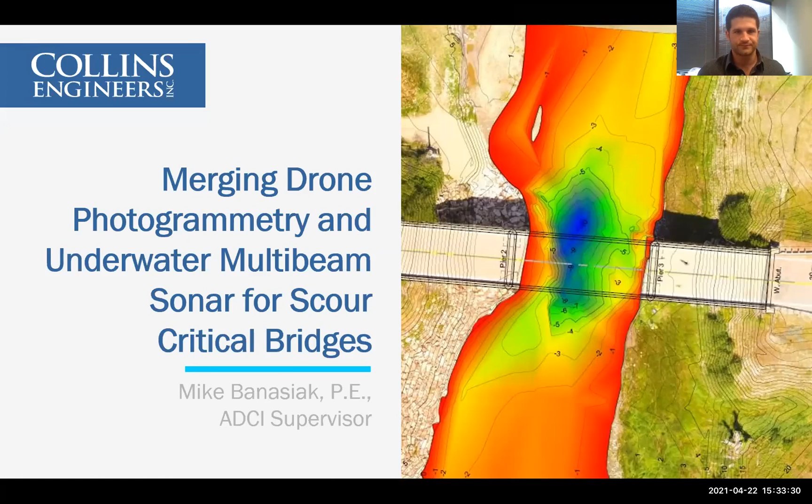That's where this project comes in. Today I'll be sharing results of an idea and project where we combined a few emerging technologies, notably drone photogrammetry, imaging, and surveying, and underwater multi-beam sonar, to produce final products that are easy to understand, quantify, and interpret.

We'll go through a case study of underwater bridge inspections we performed for Montana Department of Transportation in 2019. They came to us with a handful of their higher priority scour critical bridges. For those not familiar with the term, a bridge is defined as scour critical if the foundation of one of the substructure units, an abutment or a pier, is rated as unstable due to observed or evaluated scour—essentially the removal of channel bottom material like sand, gravel, or rocks due to swift moving current, or the effects of erosion around substructure units.

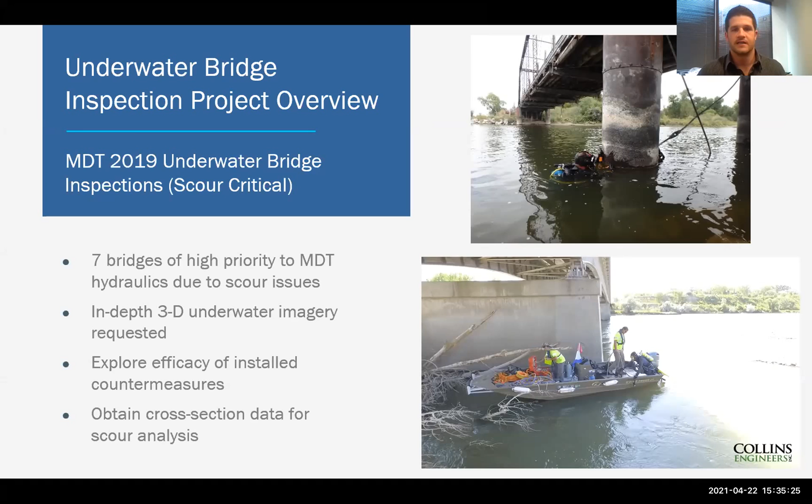The intention of this project was to perform in-depth underwater inspections, including multi-beam imaging, to assess the efficacy of scour repairs such as riprap and articulated concrete blocks, items placed around a pier to mitigate the erosive effects of high flow. We would also use multi-beam underwater imaging to establish a more detailed baseline for future inspections. These underwater inspections are our company's bread and butter—I'm a diver myself, and we use these tools to supplement our actual diving inspections.

A little bit about multi-beam sonar: underwater bridge inspections can be complicated due to factors like high flow and zero visibility, as shown in the photo of the Yellowstone River. One tool we use to illuminate details of submerged structures and adjacent channel bottoms is underwater acoustic imaging. At its most basic, a transducer mounted to a boat or tripod in the water shoots sound waves out in all directions, reflecting off surfaces—be it a pier wall, rocks, or timber on the channel bottom—resulting in point cloud data, essentially underwater 3D images.

This information can be incredibly useful—not only can it prime the engineer diver with an idea of what to expect and explore underwater, but it also results in hard data that can be replicated in future inspections, comparing changing conditions in a more quantitative manner than the subjective perspective of just one diver.

This is where UAVs and drones came into play. Underwater bridge inspections aren't simply confined to the waterline and below. There's a lot of valuable information gleaned from embankments, floodplains, and the behavior of surrounding terrain that influence the water's effect on substructure units of the bridge, especially in Montana, where water levels of some of these large bridges are highly variable.

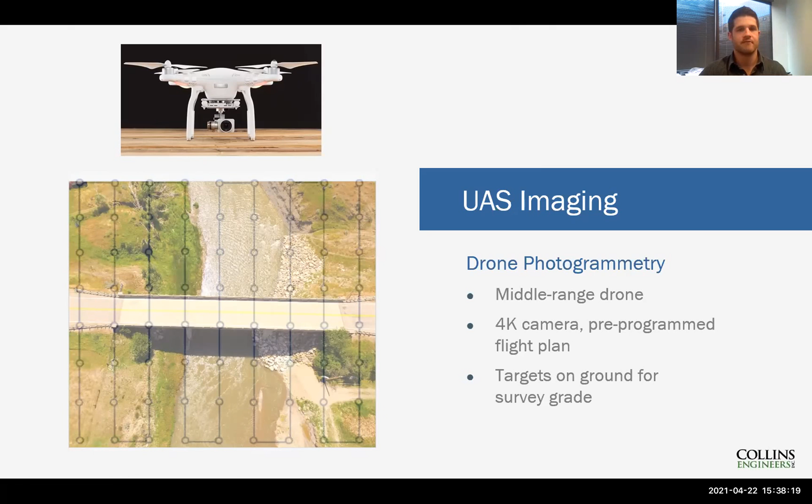So again, we're pressed for time, so I'm going to dive into some examples. What you will see is basically a 3D navigable image created by merging data from our drone photogrammetry with our underwater multi-beam sonar. Right now you see a photo from our drone superimposed on our image.

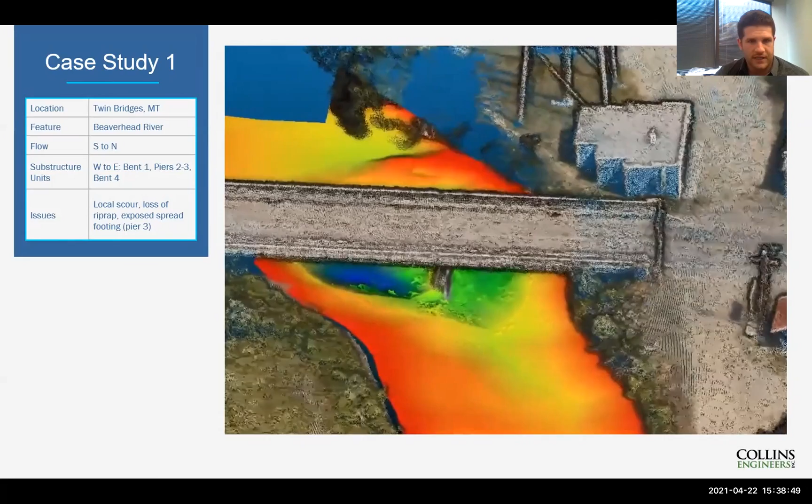I'm going to fly through and we're going to talk a little bit about the scour's effect at the bridge. For this bridge, we are looking upstream, so the water's flowing from south to north, from the bottom of the screen to the top. You'll notice from our underwater imagery, we capture a little bit of this exposed footing at the upstream nose.

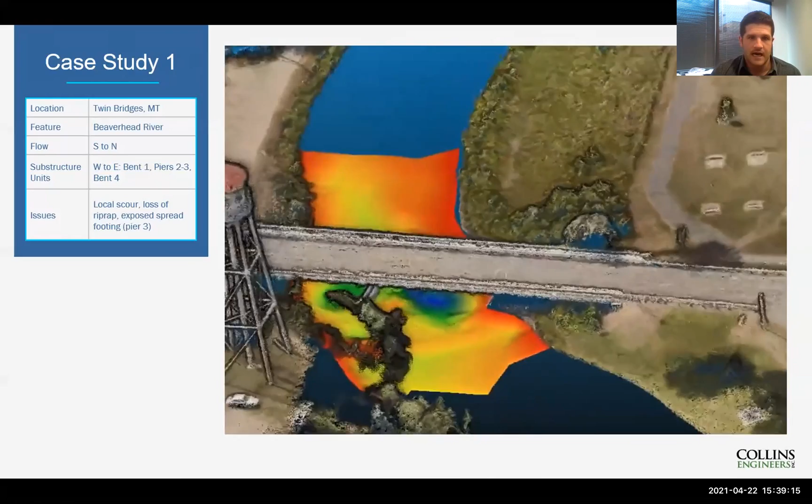As we zoom out, we notice that the channel is on a bit of a curvature, resulting in a slightly oblique angle of attack at that upstream nose. A little bit about the model: the colored area denotes the waterway. Red is shallow, blues and purples are deeper.

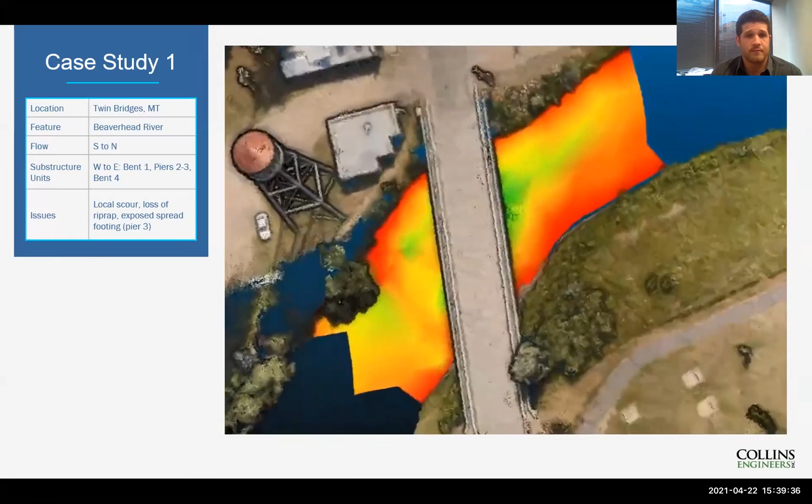So we notice this little area of local scour in this west span. Potential concerns at this bridge could be migration of the scour to the east, where it might threaten the exposed footing of the pier.

The advantage of this is, normally we conduct in-water surveying, single beam or multi-beam, acoustic imagery and sonar essentially in the water, so we just typically have a contour map confined to the water.

Adding the information from the drone surveying, we now have a contour map extending into the floodplains outside of the waterway, which can be useful, particularly for doing scour calculations, calculating cross sections, and planning for higher flow events.

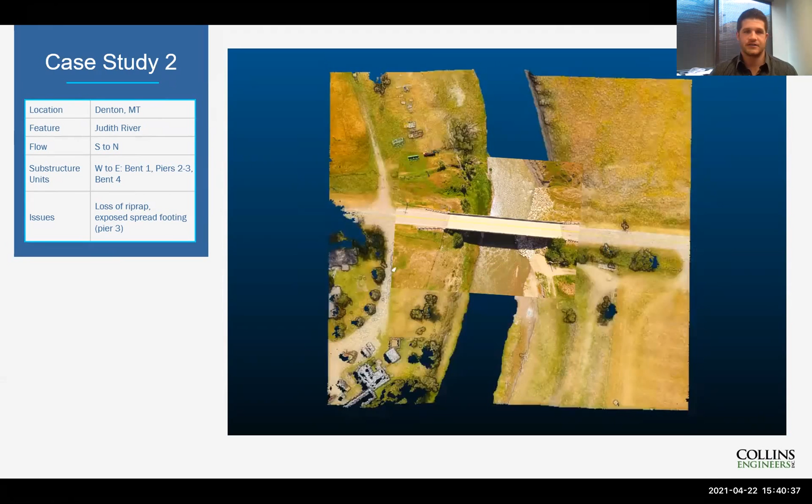Again, I'm speeding through this, but I've got some cool examples I'd like to show you. So this is another similar case where you're looking at the drone photo superimposed on our model, and I'll click and we'll zoom through.

With this example, the river's flowing from the bottom of the screen to the top. You'll notice basically we have two piers that are just barely in the water. I want you to pay attention to the riprap along this west embankment.

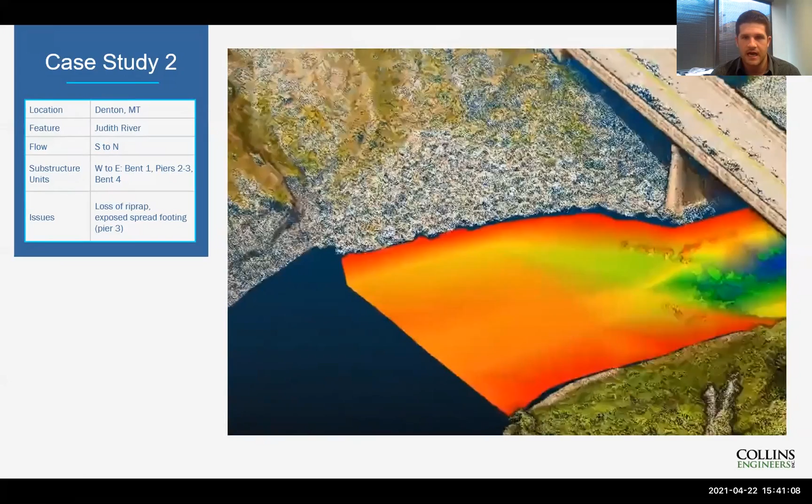So notice, we've had some riprap, or scour mitigation countermeasures, placed along this embankment, basically to encapsulate some of the footing of this pier. Some riprap was placed along this pier, but it looks like it's largely washed away.

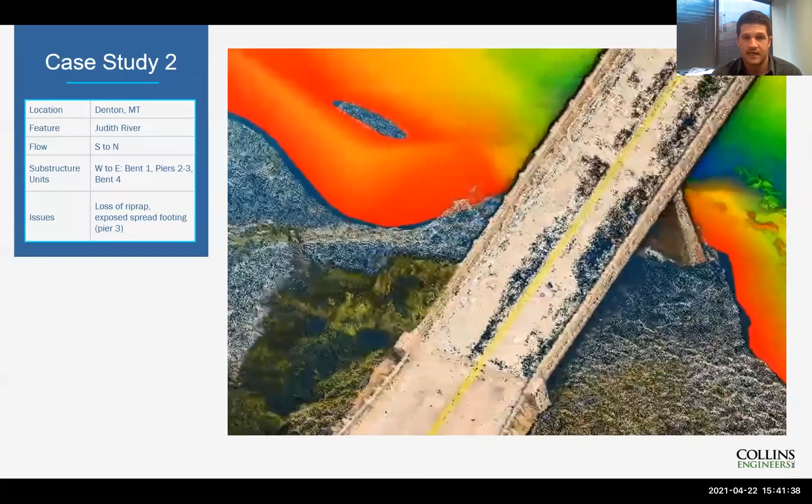From our underwater imaging, we're capturing the side of this exposed spread footing with maybe about a half foot remaining embedment. You'll notice that the underwater imagery captures some of the jagged edges of the riprap, and as we zoom out, you can confirm and see the interface where we capture the riprap via photogrammetry.

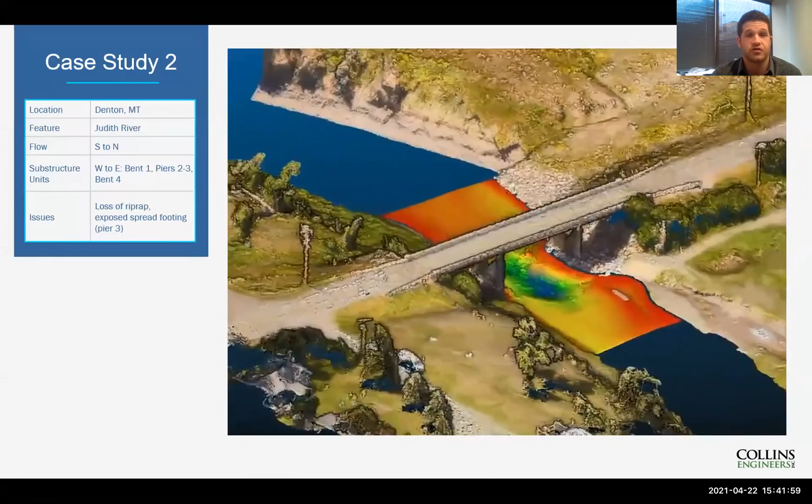As we zoom out, you'll understand the obvious reason for some of this local scour: basically our channel contracts right at the bridge. We have maybe about a 20% contraction of the channel, forcing equivalent flow into a smaller area, resulting in much more turbulence and local scour at the bridge. So I said, pay attention to the riprap.

You'll notice right here this riprap that's been placed is starting to undercut. We've got a big steep cut bank on the upstream edge, and we're starting to cut into that riprap, captured on our photogrammetry. A normal inspection would note it, but an advantage of this model is that it can be easily replicated, and we can calculate quantities and rates at which this riprap might be undercut or washed away. This model could also calculate quantities of missing riprap for maintenance items, giving prime contractors more accurate bids.

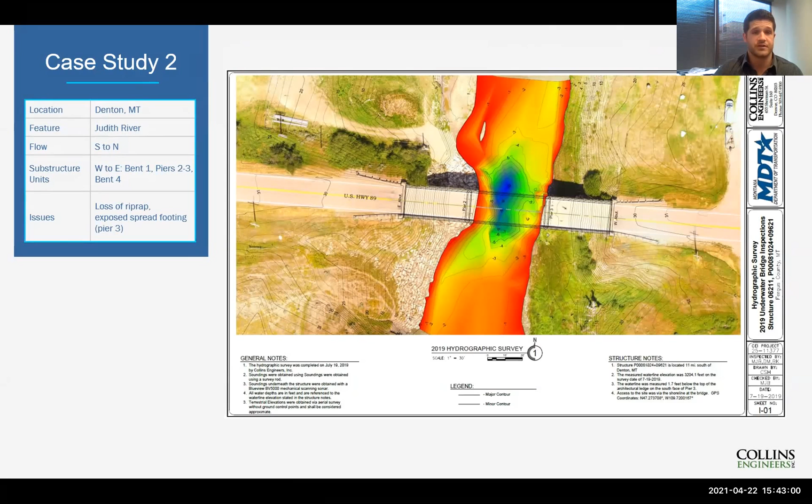This model could also be given to a contractor to plan their construction and staging for a repair to this bridge that might include further placement of riprap.

I've got about 5 more minutes, so I'm going to go through this example really quick. This is an obvious example of the visual nature of these models.

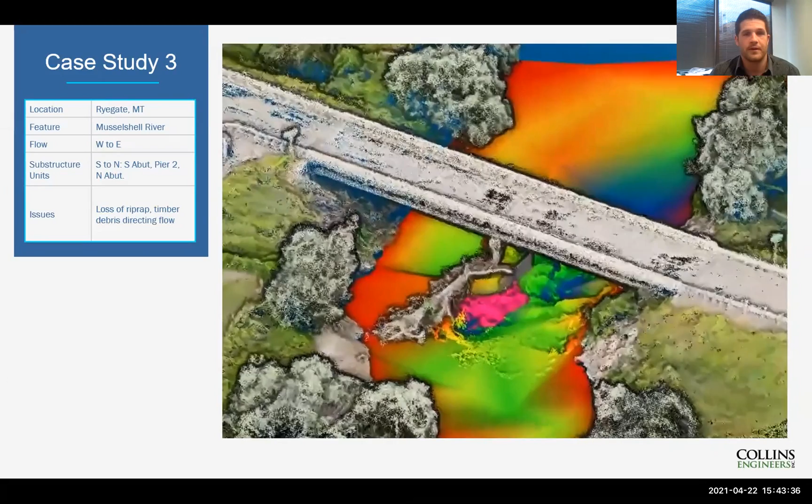We're looking upstream. We've got a large tree trunk lodged at the upstream nose of this bridge, and water's flowing this way, so it's obvious what's happening here. This tree is diverting flow into the south span, compromising the hydraulic opening of the bridge to just one span, resulting in local scour downstream of the bridge and some aggradation as that flow goes from moving fast and turbulent to slowed down by the tree, where it deposits the less dense silt and sand.

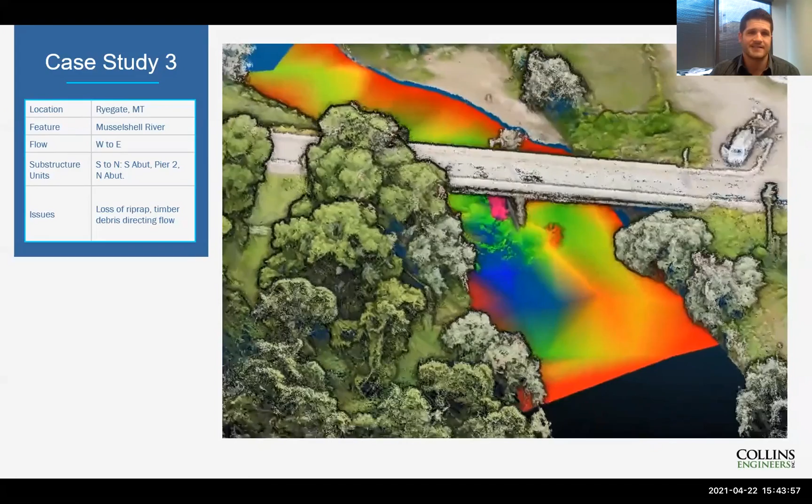And that's what we saw here. Just a good example of the visual nature of these models, showing that it doesn't take a bridge engineer or a hydraulic engineer to understand what's going on underwater and what needs to happen, which is really the removal of timber debris here.

This is my favorite example. I'm going to dive through. Our water is flowing from the bottom of the screen to the top. You'll notice that the substructure units, the piers and abutments, are built or oriented in a skew compared to where the channel is right now. So we'll zoom through and see the effects of this.

This bridge is situated in a low-lying floodplain, and we're noticing an obvious 180-degree horseshoe bend. Potentially when this bridge was built, maybe 50 or 60 years ago, the channel was aligned with this substructure unit. But over time, the outer bend of that stream has eroded, and now we're looking at about an 80-degree oblique angle of attack, resulting in local scour along that pier.

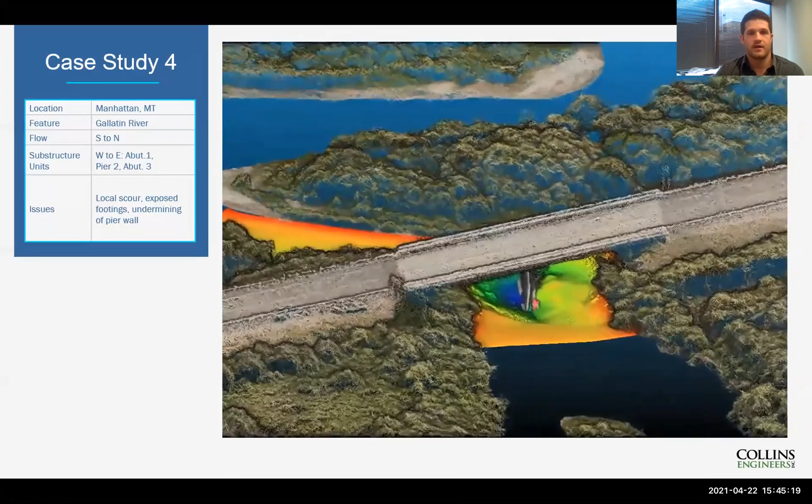The utility from this kind of drone-merged model of underwater and drone imagery is that we can see clearly the cause and effect. Note these exposed footings from this stream migration. Over time, if we were to replicate this drone mission, we could measure the rate of migration of this horseshoe bend.

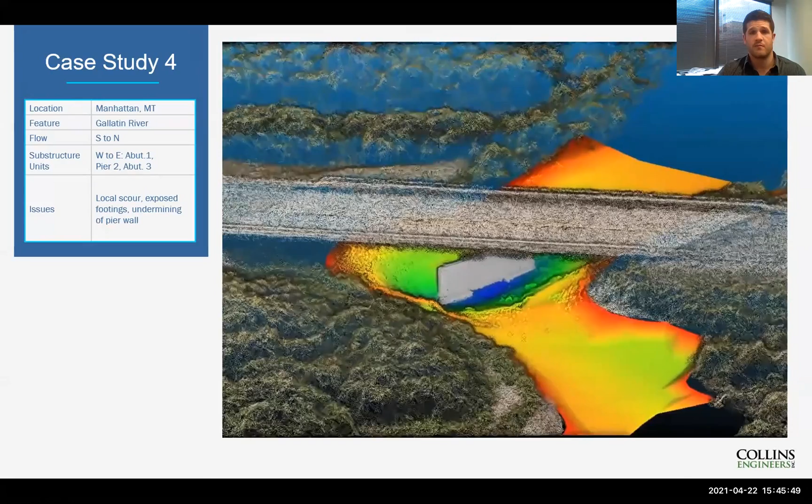We can measure the threatening of this approach embankment, and we could better assess use of resources to mitigate this issue, which might consist of some fairly expensive and intrusive processes of trying to reroute the stream with spur dikes to get it back to more of a straight-on orientation with this bridge to mitigate scour.

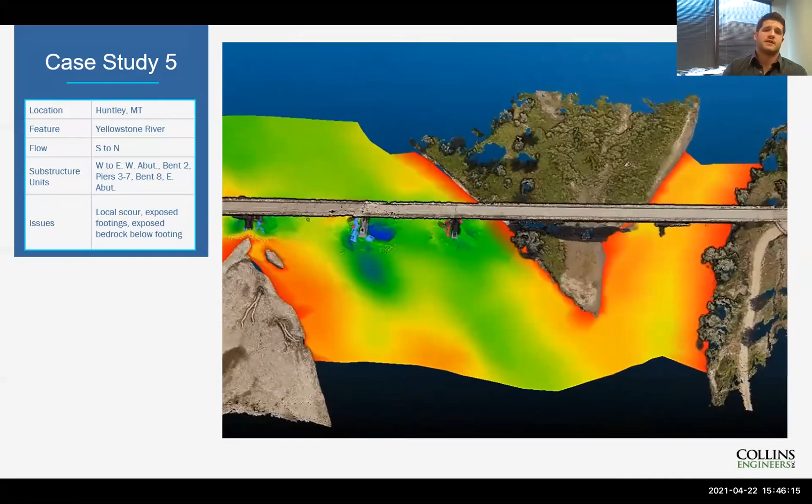Just going to zoom through this one, and then we'll wrap things up. This is another one of our larger models. As we zoom through, you'll notice that above water, we've captured some timber debris.

And actually, we've color coded the timber debris underwater as pink. With the post processing of these underwater images, it comes back as a point cloud, as opposed to drone photogrammetry where it's photograph based. So the post processing gives you much more of a visual model.

Zooming into this pier, this is the most interesting with regard to scour. We notice a big scour depression here. Water is flowing this way. So we notice we've got spread footing exposure, and what appears to be undermining, or the bottom of the footing exposed.

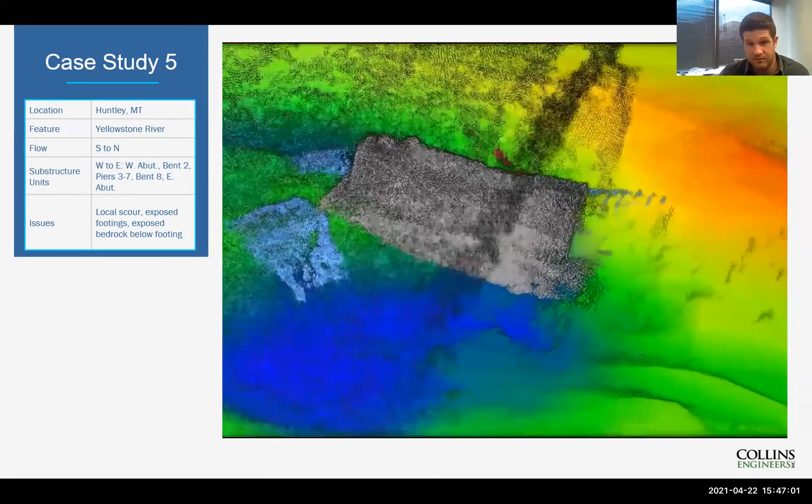And we've got these concrete articulated blocks that are on the channel bottom, placed there to mitigate scour. But it seemed that some of these blocks had been washed away out of this scour depression. Just wanted to call attention to that one.

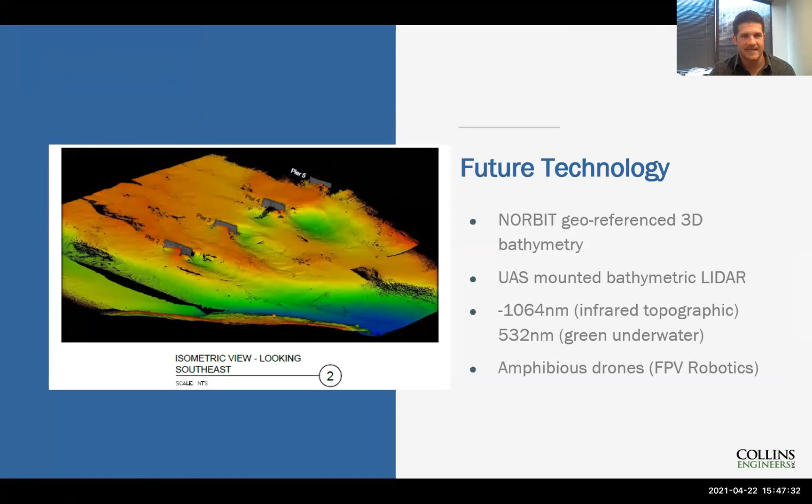Going to go through a couple of these underwater images. I'll breeze through this because it's about drones, a little bit of future technology. This is some extra underwater scanning we've been doing. This one's interesting, it's called a bathycopter. It's basically a drone-mounted LiDAR system.

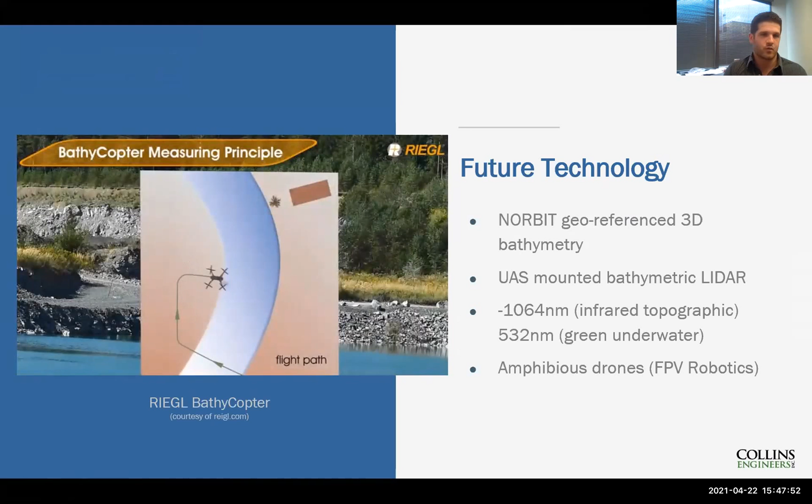So essentially in one, this UAS could fly above both land and water, and by shooting different wavelengths of light, it can survey and perform a topographic survey of both above water and below water, generating a similar map to what we did in kind of a merged effort.

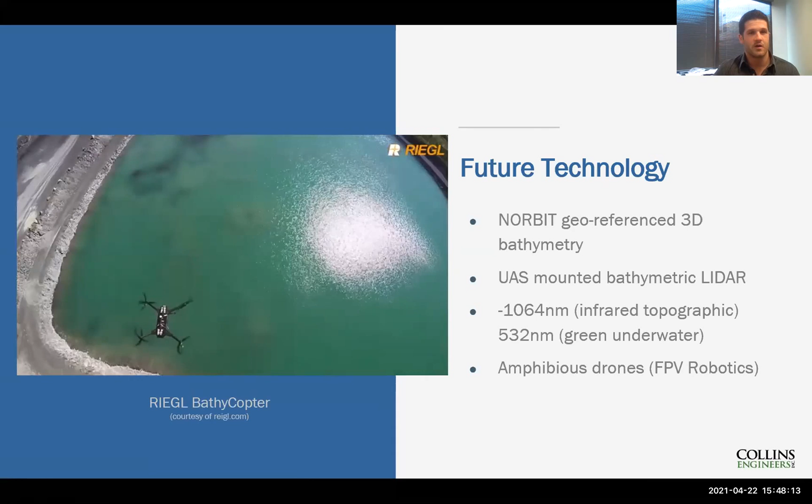A drone like this is $50K and upwards, but it's pretty slick. The end product it can make without doing it piecemeal like we did.

Finally, I think this is just really cool. It's an amphibious drone debuted last year at the Consumer Electronics Show. It's mounted with a 4K camera for photogrammetry capability, but also underwater multi-beam sonar. So the idea is you could fly a drone surveying mission, land it on the water, and perform in-water sonar, just like what we did.

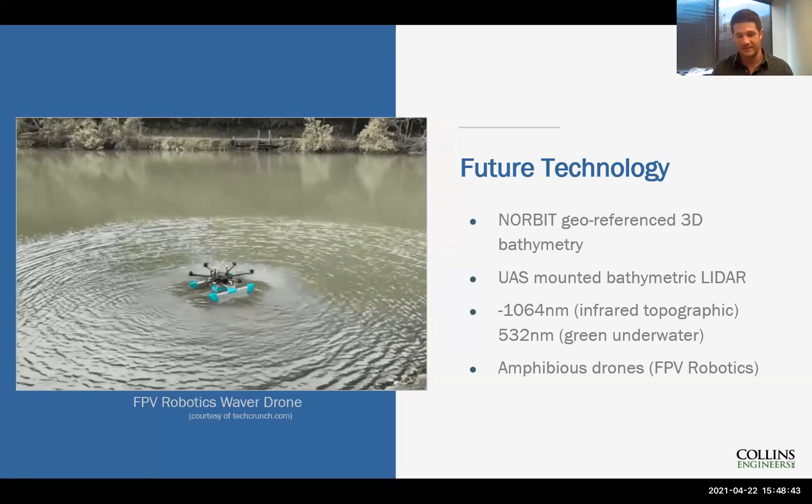But of course, it's landing on a calm pond, and we're trying to navigate the Yellowstone River at peak flow. So I have my questions how it would do in some turbulence.

But to sum it up, the project was a success. We merged two technologies to get what I believe is significant value added for not much extra effort.

I'll play out with this - the drone video I took last year of us climbing a bridge, inspecting in Wyoming. But to conclude, we use drones for a variety of reasons, and one of my favorites is just taking promo video like this.

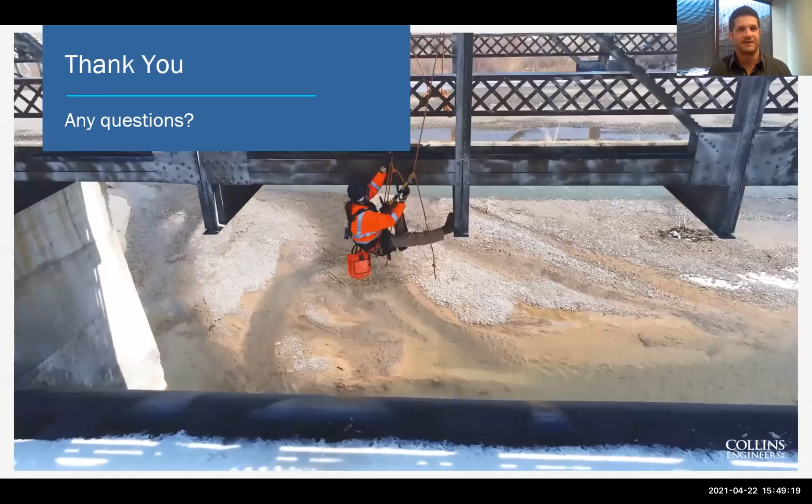But we're living in a technological renaissance, with cool new gadgets popping up left and right. While these shiny new toys are fun to play with, it's imperative to remember that we need to evaluate new technology through a lens of how it can efficiently and economically add value to what we're already doing. And so the pressure of data-driven decisions, especially in the transportation asset management world, opens opportunities to utilize the technology presented today.

Basic questions do remain: how can it cut costs, save time, and gather new or more meaningful data? So I encourage you moving forward just to analyze new technology with these simple but realistic parameters.

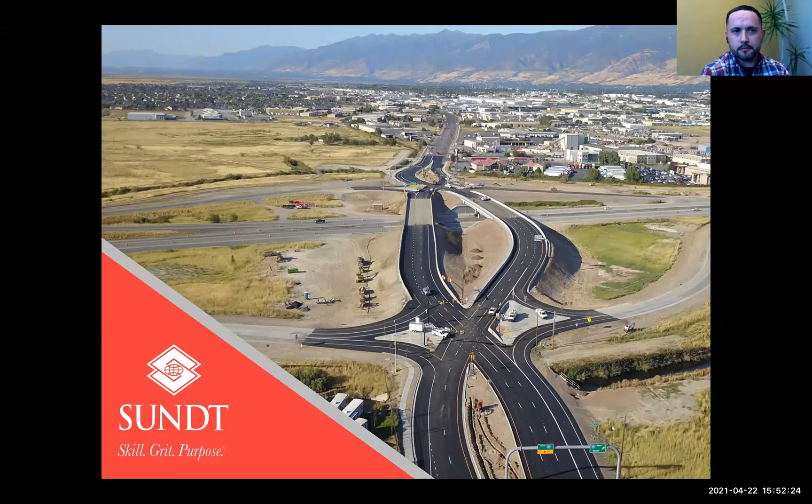So we mostly are primarily focused on major highway work, large bridge structures, and I also help out the industrial group as well - pretty much any larger project than just our standard building size, which Sundt was founded on. So any project that's 40 acres or larger.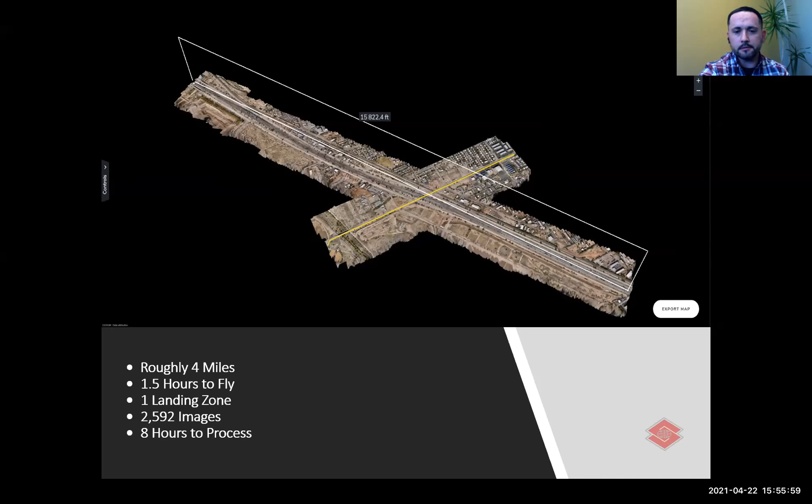And we also have a cloud-based processing option that we use as well, and that usually does cut your processing time down by about 1/3, sometimes even less, depending on the size of the job, and of course how many photos you took.

This particular project, we had a points to surface RMSE of 0.074. What that is based off of is the point cloud. There's 2 ways that you can do it, or that we do it.

You import your point cloud into whatever CAD software you're using, and you create a surface model from that point cloud. Then you take that surface model and you import the ground control points that you utilize to tie down your data. And you compare those coordinates from your GCPs to your surface model.

You can also use a digital surface model and a digital elevation model. And then again, you're comparing those models to your control point list, or your ground control point list. And that's what we came up with. So those numbers are based off of the ground control, not in between.

If there's anything that I ask you take away from this, especially if you're focused on tracking the material on and off your site, which is what we mostly get paid off of. When you're tracking 10,000 yards or 5 million yards, and you're getting paid $5 to $7 per yard, that's quite a bit of money that you can either lose or save yourself, and not just yourself, but your client as well. Because the last thing you want to do is overbill your client, and at the same time, you don't want to undercut yourself.

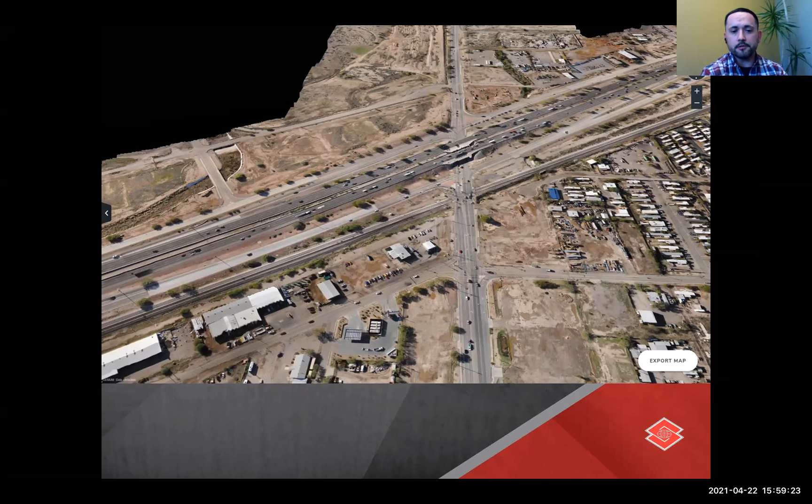The other thing it does too for us is if everything we feel is set up and designed correctly, it also does help us complete the project earlier than expected. So that's always a plus. And again, just another view from it. The other thing too that you utilize this for is, again, a pre-existing survey of the job.

This picture is zoomed out quite a bit, but when you zoom in, you really do capture a lot of the details, especially the driveways in and out of every business up and down this particular job site.

We've had issues in the past where, whether private or commercial, an owner contacts us saying our equipment caused damage to their property, whether it's their driveway, fence line, landscaping, whatever it may be. If you're fortunate enough to fly the job, once a week or every two weeks, you have proof. You have proof to show that on this date we flew this project, and this is what we captured. It's not showing what you're saying on this date, for some reason. Maybe you're mistaken, or a city truck came and did it. Who knows, there could be a number of options. But this really does save you from lawsuits down the line, God forbid.

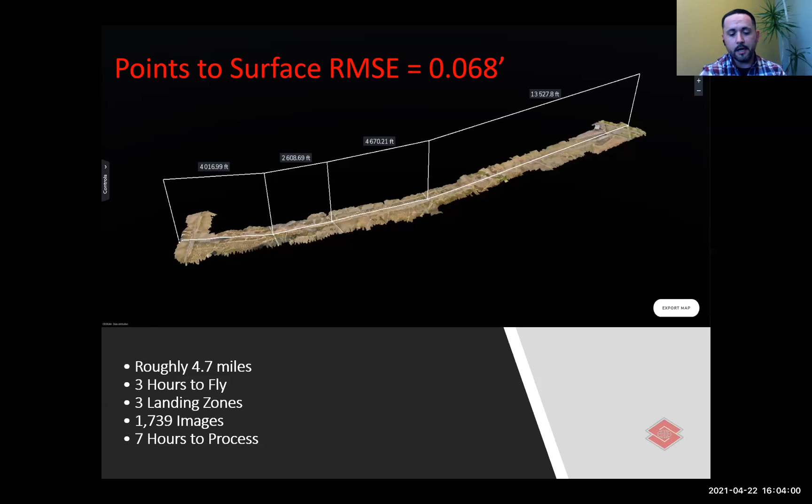This is that same project, the east end of that job. This was before these structures were actually put in. We have a railroad going right here, so we're having an overpass going in that's going to connect to this highway here, headed to the west—this being the east side. Heading west, there was another 12 miles of project that we had flown.

We like to utilize progress tracking on this particular job for environmental reasons as well. We had to stay within limits of this property, privately owned land, as well as everything outside of it, both for the owner himself and for environmental reasons. We didn't want any containers with hazardous fluids leaking onto the property—not a good call for us or the environment, of course.

This was the west side of that job. Here we have two sections of highway, an overpass going across this other highway, and then connecting over here, which was going to connect to that other east end of the project.

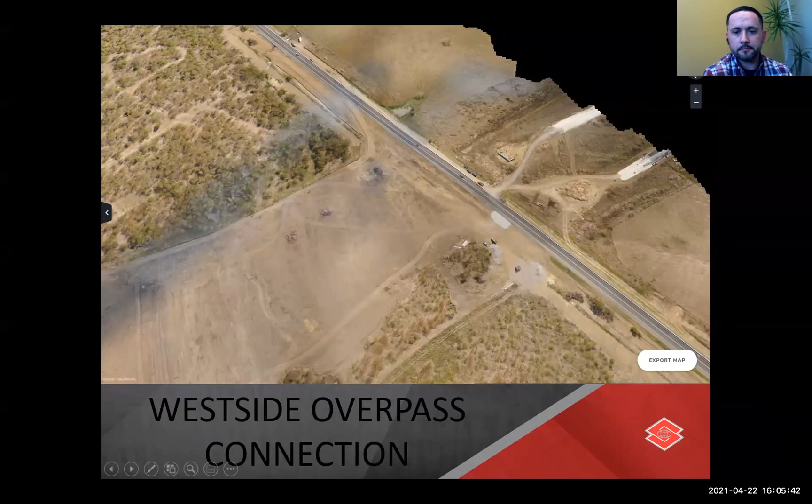This particular project was roughly 23 miles in total, three data sets. So for this particular flight, we broke it up into 3 data sets, as you can see there. The reason why we did that is for the file size. File size was astronomical on this particular project.

This section here, just this section alone was 27,000 feet. So in total, I think we were looking at about 8 miles for this one. So again, 23 miles in total, 3 days to fly, 8 hours each day.

That depends on the time of year. In the summertime, we have more daylight. But at the same time, depending on the terrain you're flying, we don't like to start flying as soon as the sun comes up, especially on terrain like this. You can't tell here, but I'll show you some more photos in a bit.

This terrain was very difficult. It had a lot of slopes. It ranged anywhere from 1,500 feet all the way down to 400 feet. So there were a lot of mountains. Well, when you have that, you have a lot of shadowing.

Shadowing technology has gotten better, so you do get data now where there are shadows, but the darker and deeper that shadow is, the less data you will have. So we truly like to fly at ideal times for the day, which ideally is anywhere between 10 and 2. But for this project, we were starting right around 9 o'clock in the morning and finishing about 4 o'clock in the afternoon.

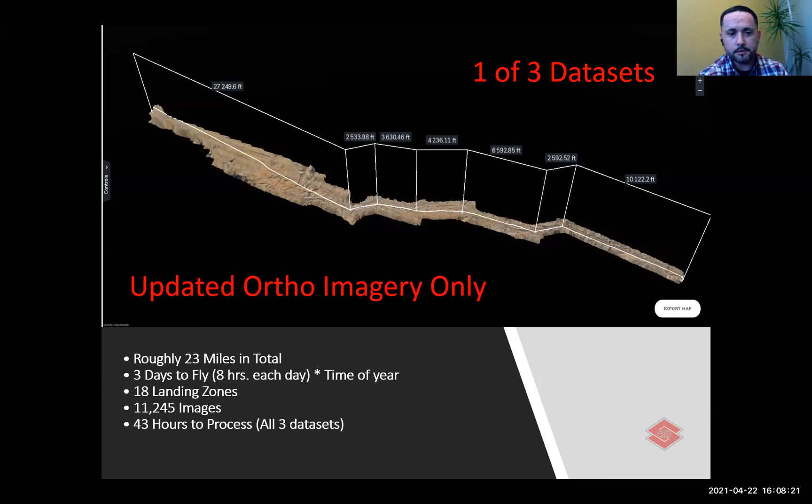Okay, so again, updated ortho image only. This right here was the northern portion of that project. At its widest point, this project was roughly 3,000 feet wide.

I don't know if you guys are familiar with Arizona at all, but this was the I-17, about almost midway between Flagstaff and Phoenix. That's where this project was. We're going after a current project there, as a matter of fact.

So drone technology really does allow you to capture a lot of data in a short amount of time. Again, it just depends on what you're going to utilize it for. Another section of that project there.

All right, our deliverables and what we have: a data quality report. This is key to proving the accuracy of your data, not just to yourself, but to your client, and for your own in-house records, I guess you'd say, for lack of a better term.

Your densified and/or grid point clouds. There is a big difference there. On a grid, you can specify how you want that grid—half a foot, 1 foot, 3 foot. But when you do a grid point cloud, what we've noticed is you lose a lot of data. You lose the berms, you just lose too much data. So a densified point cloud, in our opinion, is the way to go.

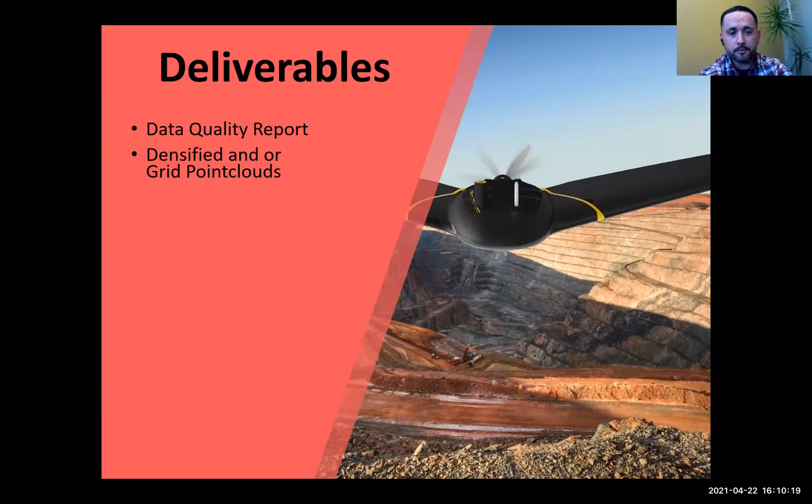I'm really running out of time, I've got about 3 minutes here, so I'm going to run through this. I apologize. A 3D mesh, a raster DSM, your raster DTM, a complete ortho image, contours starting at 1/10 of a foot all the way up to whatever you prefer, and an updated Google Map image, which a lot of our guys like because they're more familiar with Google Maps.

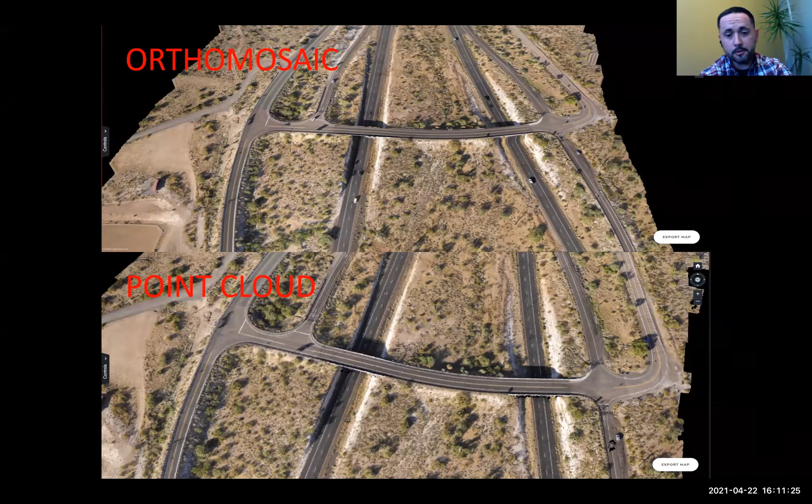Again, depending on overlap, the camera you're using, and so on, you can literally generate data on an average of every 2 to 3/10 of a foot. That's your point density, and that's extremely impressive, as you can see here. Again, the ortho image up top, contours here with your heat map of that same area.

Material inventory. We also use this to track inventory that we are either paying someone to remove from our project, or bringing dirt onto that project. You're looking out for yourself and your client, or the company you're paying to remove that material from your job. It's just keeping everybody honest.

Louis, you have about a minute or so to get completed. Okay, 10-4.

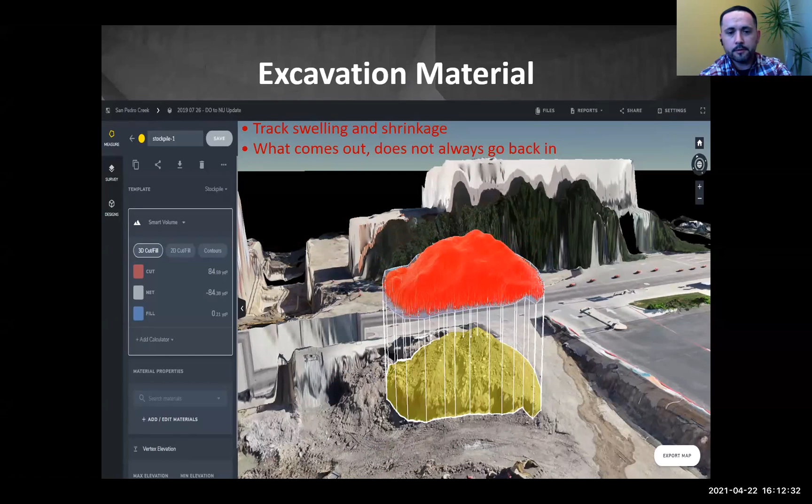Thank you. Here again, we had pipe go in on this project. The spillage left over there, this is just what we're trying to track: swelling and shrinkage, and we paid to have that material removed from the job.

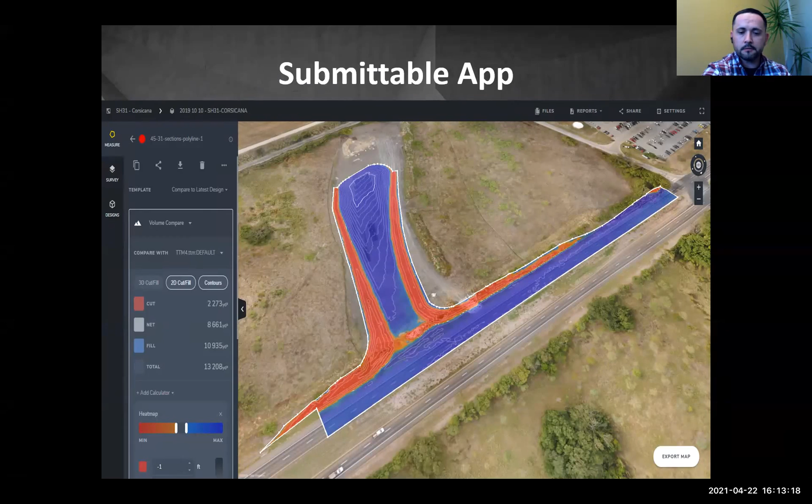My apologies, I know I'm losing time, but one thing I really want you guys to see: you can literally import the surface models your surveyors are using in the field and take that same surface model and compare it to what's on the ground. So you can run extremely accurate volumetric reports from this. Please utilize that technology.

It is impressive. Here as well, we are just doing as-builts, verifying that all of the pipe is going in where it needs to be on the job.

David, am I up on time there, sir? Yeah, if you could just summarize it, so we could make sure we give enough time to the other two presenters. Absolutely.

So pretty much what I'd like to finish with is: definitely choose the technology you're going to fly with wisely for the application you're going to use it for. RTK and PPK tech is imperative for this type of work. Flying large projects, tracking material, please do that. Use that technology. Communication between yourself, your project managers, and in the field.

And last but not least, verify your data. Please verify the accuracy of your data, not just at the ground control points, but in between your ground control points. That's the data that floats, that's the data that can get away from you and can really screw up your numbers. So thank you very much for your time, I appreciate it.

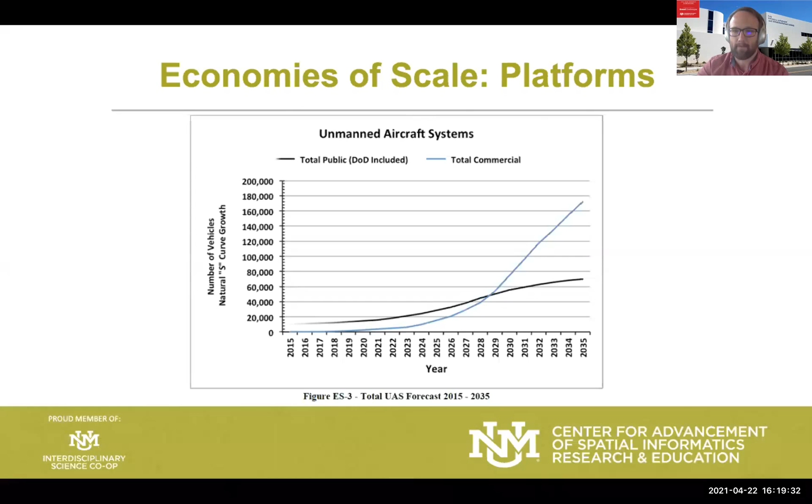And the same thing's happening with our platform technologies, right? The drones that we now all think of as fairly commonplace and ubiquitous were an impossibility 20 years ago, and were an extremely expensive and time-intensive activity 10 years ago, and now are becoming routinely available, and economically practical to apply for a lot of different applications. Certainly not all, and the hype exceeds the reality at the moment, but that will change.

It's the precursor to the Trimble UX5 system. They bought Gatewing, and then swarms of micro drones are becoming a reality. We all saw them at the Olympics, but it's becoming a reality for sensing and practical for sensing in some cases. And then the ones we all know are rotary wings - those are the ones that we curse at the beach, and everybody's uncle now has crashed at least one of.

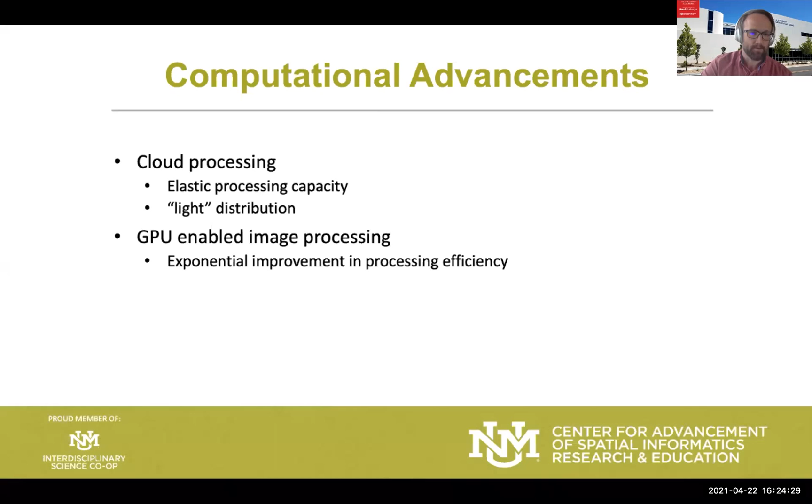The other big computational advancement, obviously, is GPUs. If you don't have NVIDIA stock yet, I suggest you get it, because they are enabling all kinds of things, not just Bitcoin. They are the core behind all of the SFM-MVS data we were just looking at in the last presentation, all those surface models. If you didn't do those on GPUs, they would be impossible—small blocks are possible over periods of hours, and large blocks are impossible without GPU processing. All of that is feeding into and making bigger and bigger jobs more practical, meaning we can ask the system to do more intensive analytics on big data sets.

And I promise I'll get away from text in just a second here. So in the last presentation we were looking at the surface models and the orthomosaics that are pretty readily available to produce in commercial software at this point.

There's good competition in that space—there's at least a dozen providers of software. They all run on GPUs, but that wasn't possible 15 years ago because this tech, both the hardware and these techniques, hadn't been adapted to photogrammetry yet. Those automated bundle block adjustments have tremendous power, as you saw in the last presentation, and we've done some work on them—the limits haven't been hit yet, for sure.

I'll talk about that as one of the big techniques underlying how many of you, I think, would consider using drones first. I'll talk about some work we've done in change detection for infrastructure at very high spatial resolution—at the crack scale, detecting delaminations, cracks, rutting, shoving, and other small deformations. And then I'll talk about some work we're doing with advanced feature detectors, because these, to me, are the building blocks of inspecting infrastructure from drones.

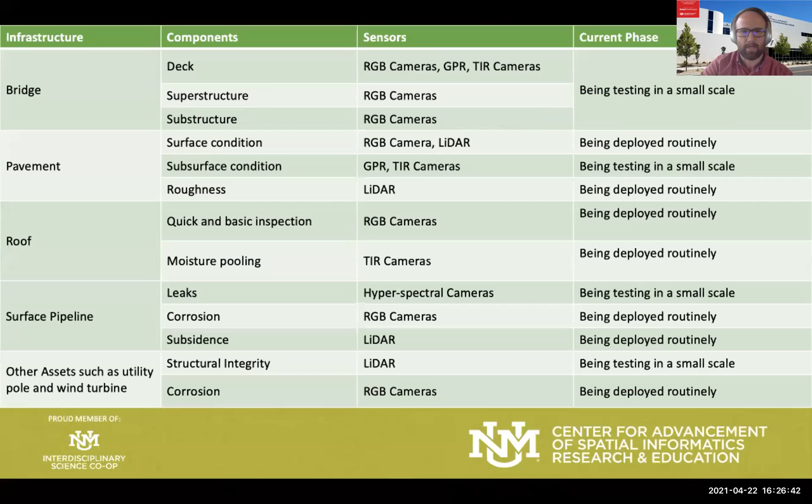This is just a quick summary—this is changing quickly, I'm sure it's out of date by now. It was only put together a few weeks ago, but I'm sure it's already out of date. These things are just now, as we're talking, percolating out into real business operations being relied on. Leaders have been doing it for a number of years already; the middle of the pack is adopting as we speak. So all of this that I'm saying now will be different shortly, thanks to all of you folks.

The photogrammetric techniques referenced in the past two presentations are dependent on an approach called structure from motion. When we do traditional photogrammetry, it was a much more manual process. This technique is actually adopted from robotics and from trying to use a camera to reconstruct a scene.

SFM-MVS, structure from motion multi-view stereo, is the technique you've seen today. SLAM is a related technique that lets you do things much faster—you may have seen mobile apps for 3D pile scanning, or for placing a virtual couch in your living room before you purchase it. SLAM uses your cell phone camera to reconstruct the surface of the floor and estimate where it should place that sofa. Those techniques, it turns out, have no limit in terms of scale—the only limitation is the data you feed them.

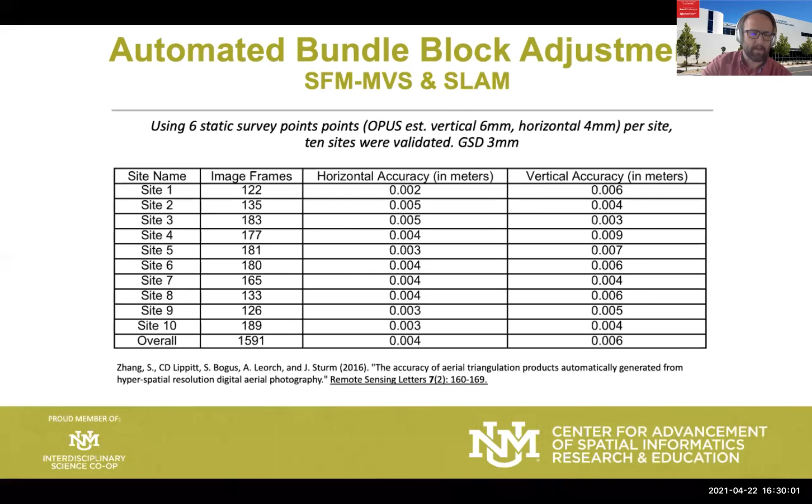But if you want to do change detection for this—meaning automating the identification of new stuff in the scene or changes in the scene—it becomes really difficult. There's a lot of distortions in imagery. Terrain causes massive distortions, and in high resolution scenes, terrain can be something like a curb or the curvature of a road. That all causes distortions, so if you want to be able to actually compare one image to another, you have to take some special care in how you acquire it.

So this is a technique we call repeat station imaging. I'll just show you a couple of scenes of imagery from that. This is actually up at Camp Roberts in Northern California for a Defense Department demonstration. But what you're looking at here is a couple of scenes of data, and I'm one of those shadow dots running around moving targets.

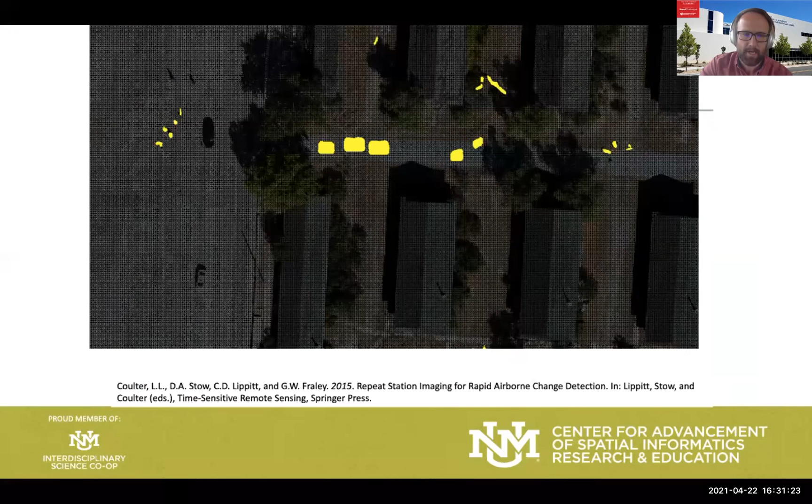What this project demonstrated was onboard change detection. So we were flying this and detecting all of these changes on the fly for security applications. The technology, if you think about it, is already available to be able to detect really small stuff—in this case, we're detecting things on the order of a few inches to feet.

I'll show you another one here—we're detecting the movement of mostly vehicles. But if you've ever tried to work with imagery and line up imagery like this, you've probably never seen imagery line up this well. That's because of this repeat station imaging approach that we've been using for a number of years, and it makes it so we can completely automate this process. This imagery is co-registered on board, we find the changes on board, and we actually use it like a server in the sky to come in through web protocols to see all those changes. So you can see what is hard for the naked eye to identify becomes quite straightforward to identify.

Well, it turns out this also works quite well in 3D. If you use repeat station imaging—meaning we actually acquire from the exact same photo stations using the exact same sensor—and we process them in a frame-by-frame way instead of running the orthos first, there are papers you can look up, or I can tell you about it in more detail. But if you acquire imagery in that way, we can actually get volumetric change detection to be a lot more accurate than we can with a simple DSM to DSM comparison.

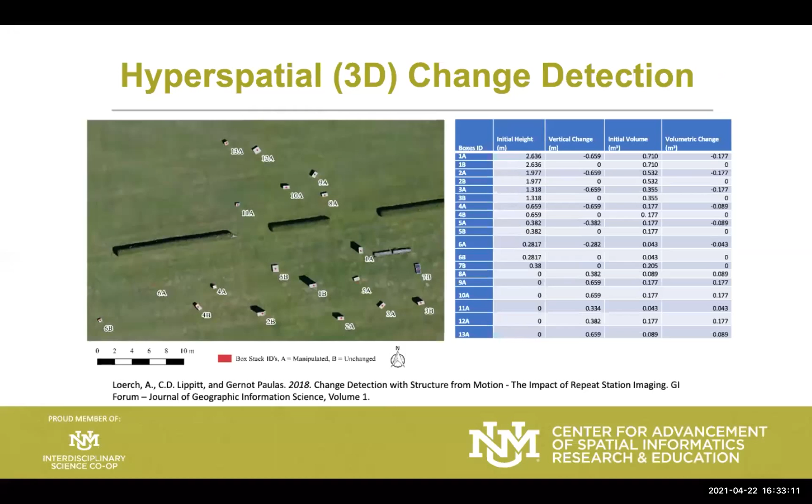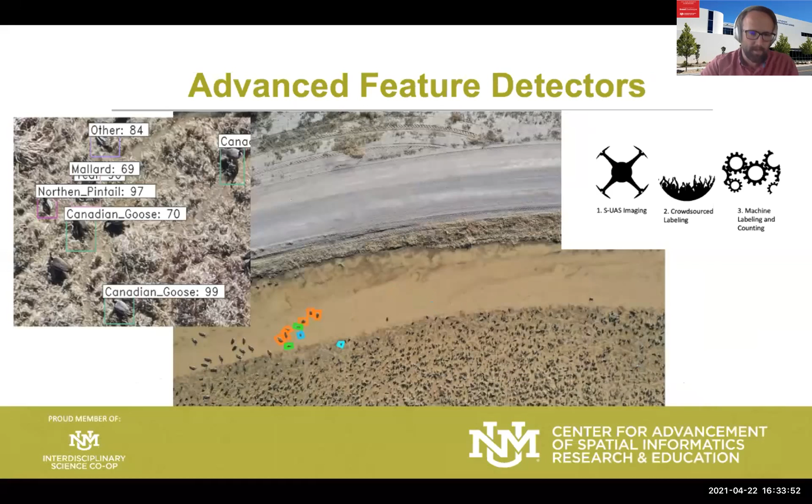No problem. So if you want to think about automating any of that process, you have to get to something ontological—you have to actually know what you're looking at. On that front, this is an example project we're working on with ducks. You can do the same thing to find all the turnbuckles, or to find all of a certain feature type. So we're using CNNs, convolutional neural networks, to identify waterfowl. We fly imagery, we have users label that imagery, and then the CNNs go and identify those objects.

These are really now, in that sense, we just teach the machine to go find what we want it to find. And what we've found recently is that no matter how you implement any of these automated technologies, you've got too much to deal with if you actually want to be able to inspect it. All of these—the feature detectors, automated change detection, and the automation of elevation extraction and geometric correction—are key building blocks to making it so that we can actually leverage these data instead of getting blown away by them and quickly overwhelmed.

I'm going to quickly skip over this, but I want to show you two quick projects. This is a project doing pipeline inspection, and the company that built this was a student of mine, and he is now running a company doing pipeline inspections.

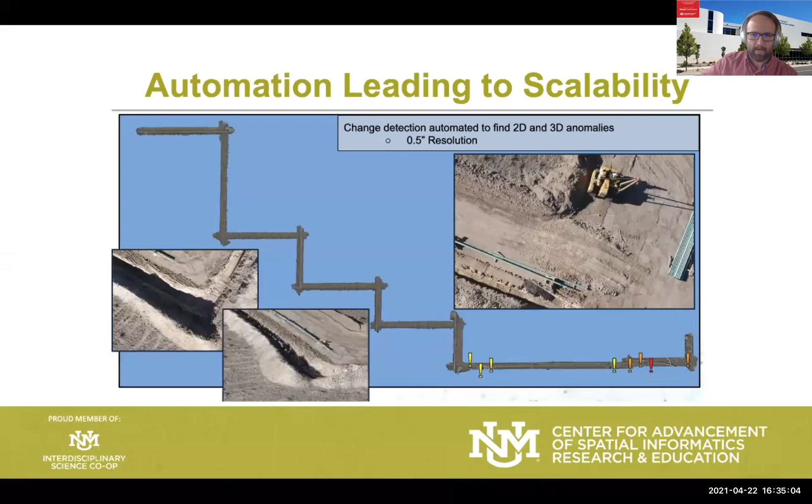When you're flying thousands of miles of pipeline, finding the anomalies becomes a real task, and that's a lot of human labor. So we use these feature detectors to actually go and find those. We could never have looked at the terabytes of data he's collecting per week, but we can go and find all the things.

And then what we quickly figured out is when you're dealing with liability, with infrastructure—and this is another project for the USDOT—having an engineer in the loop can be a really critical part of the process. So we automate parts of the process, and then we bring in the expertise to make it so we're providing the best answers we can, and a degree of confidence in that result, because it's got that reliable human in the loop that people already trust.

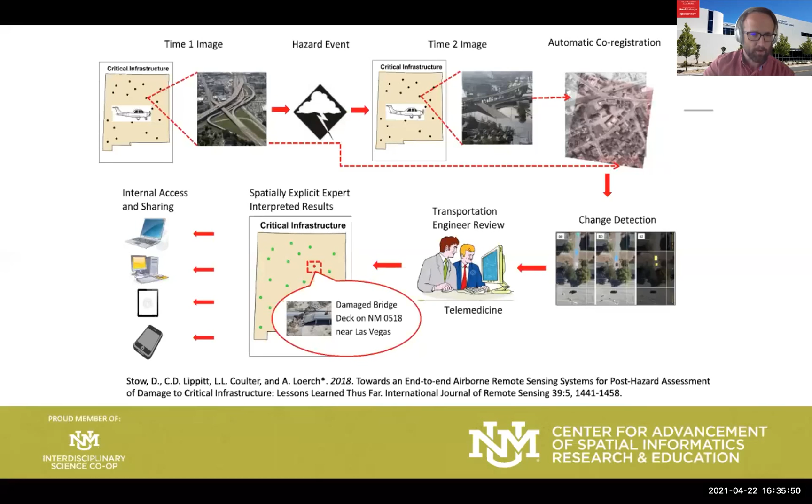So just really quickly, if you are going to think about applying any of this, be intentional about it and get it into your standard operating procedure. Hybridized approaches right now are far more practical than fully automated approaches. So any company that's telling you they can fully automate things, I would be dubious of.

Inspection and damage detection is just one use of this type of data. What I find with a lot of users is that you have to think about all of those uses of as-built and other sides of the company and how they might use that data to justify the initial investment of getting into it. And then the big lesson is just think about the data and what you're going to do with it afterwards. Are you going to store terabytes of data? Are you going to have people analyze and review terabytes of data? And if you are, then what is the workflow and process to make that practical? I'll leave it there.

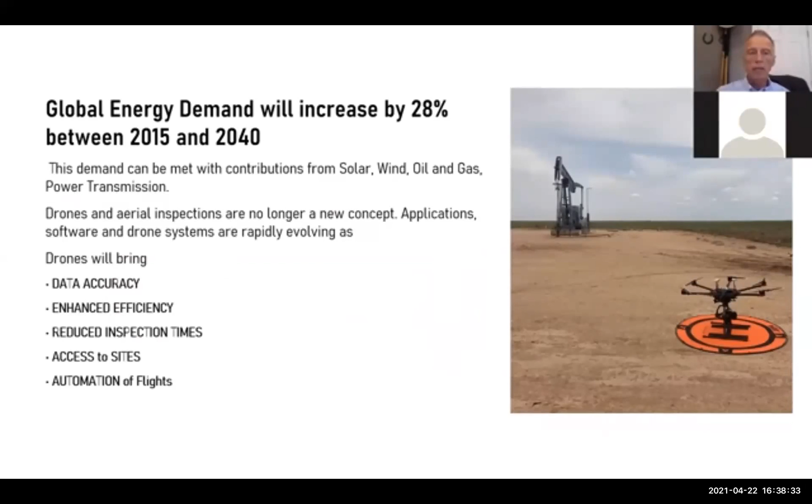We're hearing that global energy demand is going to increase by about 28% between 2015 and 2040. And we think drones are going to be a solution to this because they bring to the table data accuracy, enhanced efficiency, reduced inspection times, access to sites, and automation of flights.

An interesting thing about collecting data with a drone: it's usually 99% accurate, and it can be both historical and repeatable, which is why we use it in these industry segments—such as solar, where we do panel inspections, commissioning, and maintenance; and in the wind turbine market, where we do blade mapping; and in oil and gas, where we look for methane in flares, tanks, pipelines, and locations. We also fly our drones on power lines, inspecting for quality of transmission and maintenance.

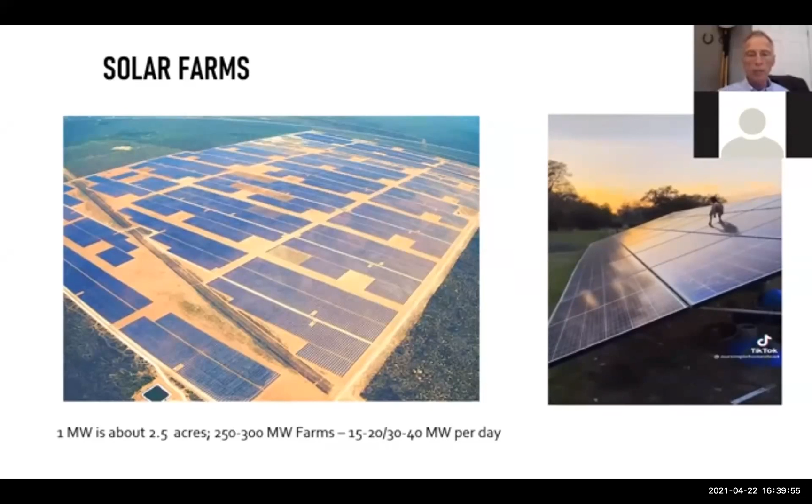Some of the equipment that we're using: looking at an M210 or a 300 drone, a solar meter, and a wind meter.

The National Renewable Energy Lab identifies 3 major faults. One is a module fault, looking for specific cell damage or diode fails on the panel. Another is a string fault, which might be caused by a frayed cable or something like that. And then a balance of system fault, which is related to module mounting.

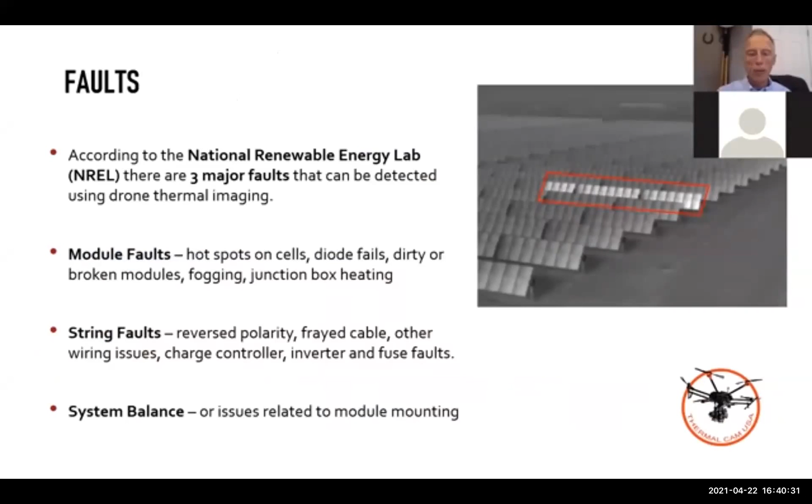We're looking at essentially four different times when we fly, usually during construction, to identify what's going on in the different phases. We'll do it in a commissioning phase where it's transferred from construction to new owner. We'll fly existing farms, and we'll fly for ongoing maintenance.

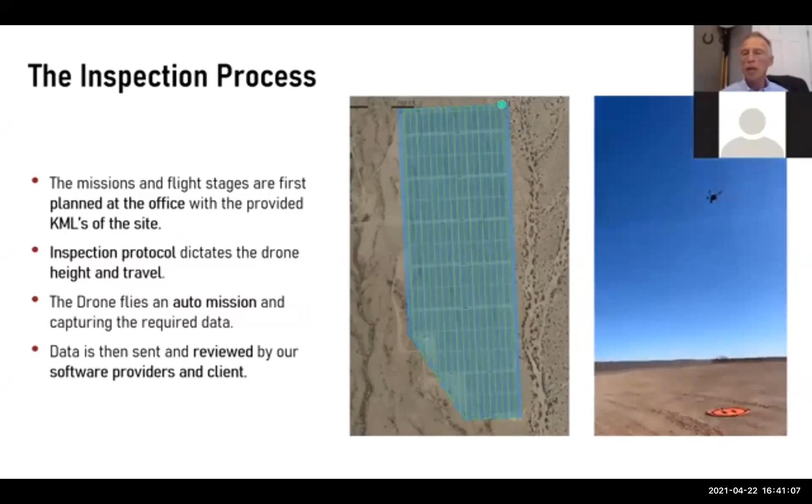Flights are staged using KMLs of the site, and then the inspection protocol dictates how high and what the travel is of the drone. The drone will fly on auto mission, it'll capture its data, the data is sent to the software providers and then ultimately to the client.

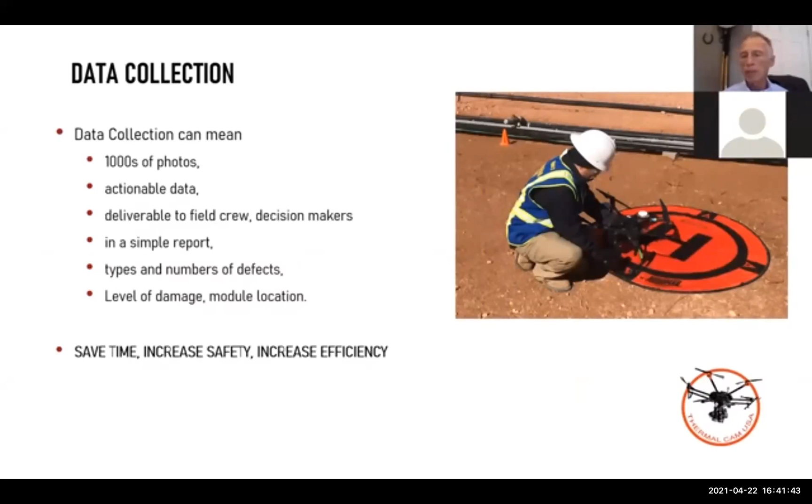Data collection is pretty extensive. We collect about 1,000 photos, thousands of photos. It's all identifying actionable data. We deliver that to the decision makers in a simple report that identifies numbers and types of defects, the level of damage, the module location, and ultimately we're there to save time, increase safety, and increase efficiency.

Thermal capture requires a high resolution camera, usually a 640 by 512. We normally fly with a 13 millimeter lens, and we're trying to provide a visual history of the damages or the defects, what we call the 3Ds: defects, debris, and dung, which is essentially bird feces.

Our flight height is dictated by what we're trying to capture. If we're looking for individual diodes or cells, we're usually flying at about 120 feet AGL. If we're trying to do a string, we're at 200 feet. And if we're mapping, we're 300 to a max of 400 feet AGL. We'll fly trying to capture an 80-20 overlap.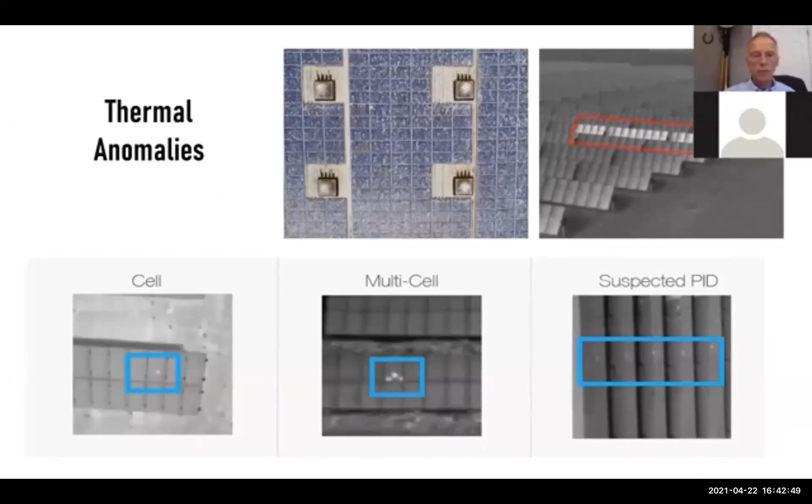The irradiance meter can provide solar levels on the panels to give us an indication of when to fly and when not to fly. Beyond visual line of sight is a kind of common buzzword right now, BVLOS.

It can speed up the flight and data collection by as much as 50%. It's pretty much limited by how much battery power we have left. The result is a 2-week flight can become 3 days. That means we can increase the efficiency of the flight or the frequency of the flight. We can find more anomalies faster, and we can deliver that back to the farm owner, and he can optimize his production.

The solar industry grew by about 43% last year. We think it's going to grow again in 2021. According to Wood Mackenzie, over the next 10 years we're going to see about 324 gigawatts of new capacity, which could mean carbon reductions of about 110 million annually.

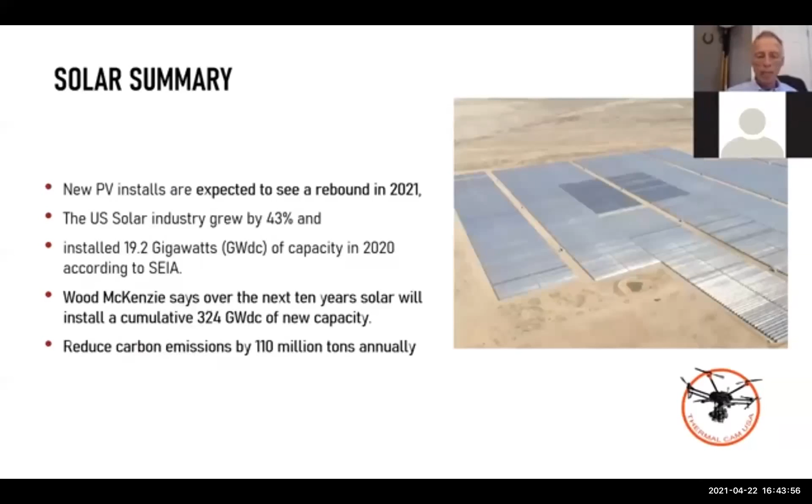Drones will reduce turbine downtime and man hours by about 75%. They are more...

Maddie, we don't have the sound at this point. I'm not sure if this is across the board or not.

We also use the M300 DJI. We fly an autonomous drone inspection. It lowers our flight time on a blade to somewhere around 8 to 12 minutes.

The software we use increases the accuracy to find 90% of the defects. We can deliver a report to engineering and essentially speak their language with the report.

The drone itself carries an RGB camera and a LiDAR system. The RGB documents all the defects. The LiDAR keeps it at about 3 meters from the blade, and the LiDAR also indicates the size of the damage.

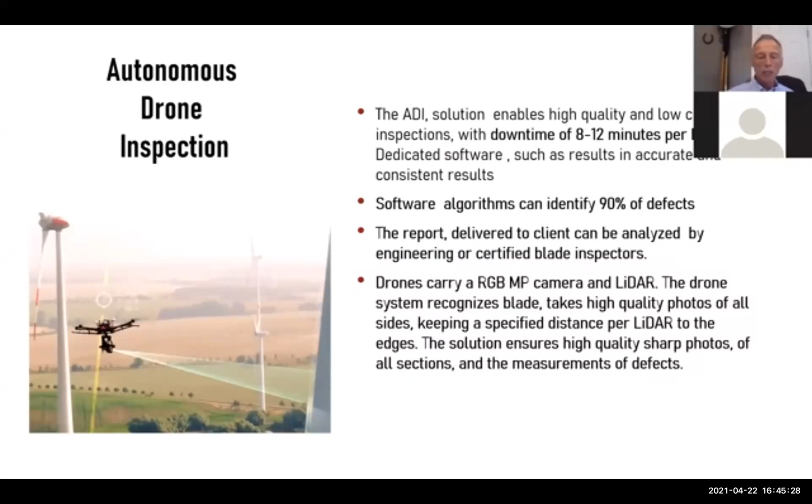We plan the mission the same way, or similar to what we do in solar farms. We get the information from the client, plan the mission. The mission itself is automated, and the onboard controller actually dictates the flight path, and the camera system takes all the high-res photos. Then we'll take that data and upload it to the cloud for further processing and deliver it to the client.

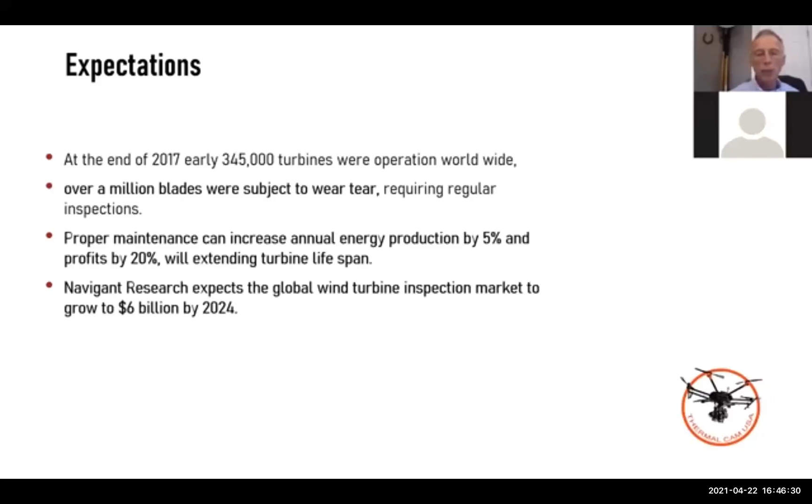According to statistics from 2017, there were about 345,000 turbines worldwide, which means about 1 million blades were subject to wear and tear and needed inspection. We think proper maintenance can increase annual energy production by about 5% and bring about 20% profits to the bottom line while extending the life of the turbine. Navigant Research says the global wind turbine inspection market could grow to about $6 billion in 2024.

Delamination causes failure and affects the efficiency of the blade. This is usually caused by environmental damage while in operation, from lightning strikes, hail, or whatever is happening. It can affect both the outside and the inside of the blade.

An average blade is about 61 meters in length. Two-thirds down that blade, the interior is about 3 meters high and about half a meter thick. This means there's limited manned inspection on the final 45 meters. However, blade crawlers, robotic crawlers, can be a solution, and internal drones are gaining more and more popularity.

Here's some good pictures of a drone actually in the middle of a blade, and on the right you can see an operator in the nacelle flying the drone.

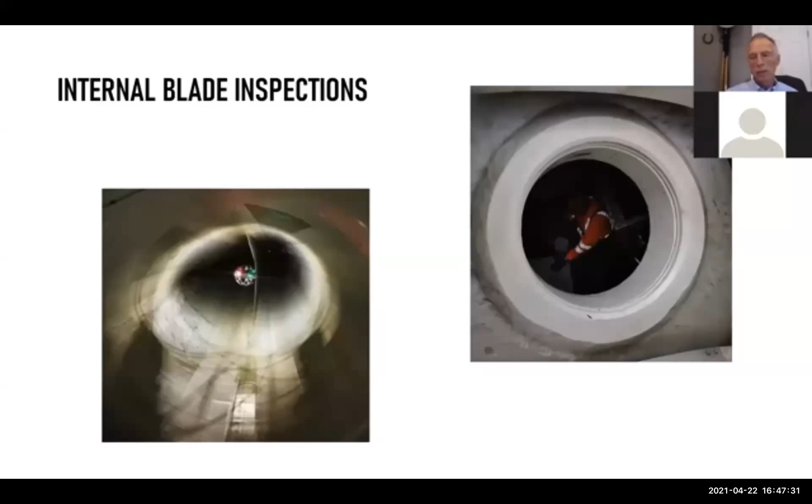The caged UAVs bring safety to the market faster, they're safer, there's less risk, they shorten inspection time, and they reduce costs.

However, they do have some limitations. They have to carry navigation cameras, light systems, positioning, both global and indoor. They're small, about 10 centimeters, so they can get to the end of the blade to record and collect data, which means they have limited time and limited battery capacity.

However, blade manufacturers are recognizing the fact that you can inspect a blade internally with a drone, and they are modifying their construction technology accordingly.

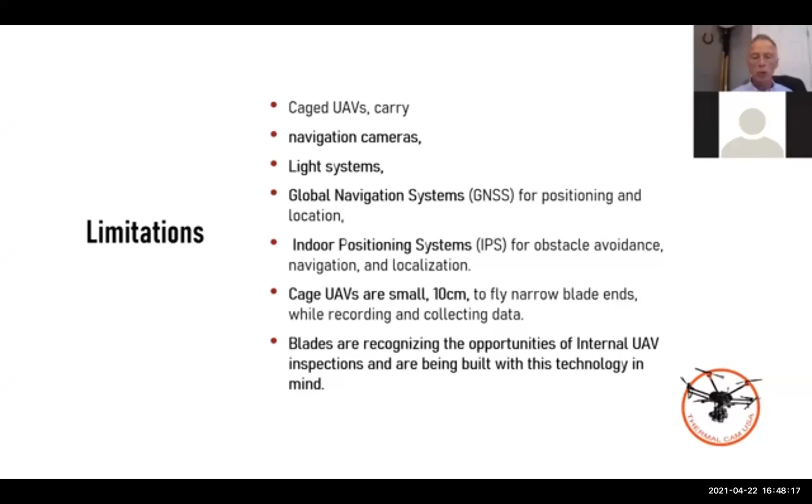Here's a good example of robotics inspecting the outside of the blade. Those robots are compact, portable, can be controlled remotely, they can inspect, they can document, and they can even repair, which is cheaper, faster, and safer than hoister and rope crews.

A good example of a robot is the Aerones robot, which can do a conductivity test on a blade. It can do leading edge protection and repair. It can clean the tower, do a visual inspection, and then it can actually clean the drain hole.

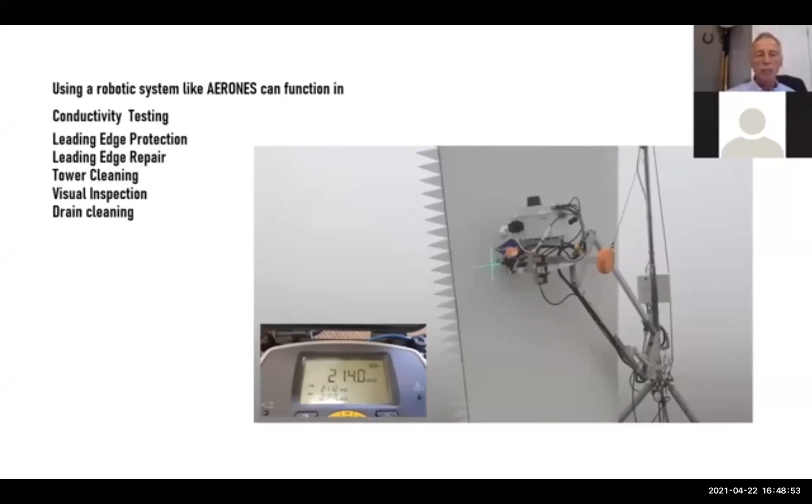Maddie, please unmute yourself. I think that's what's controlling the voice.

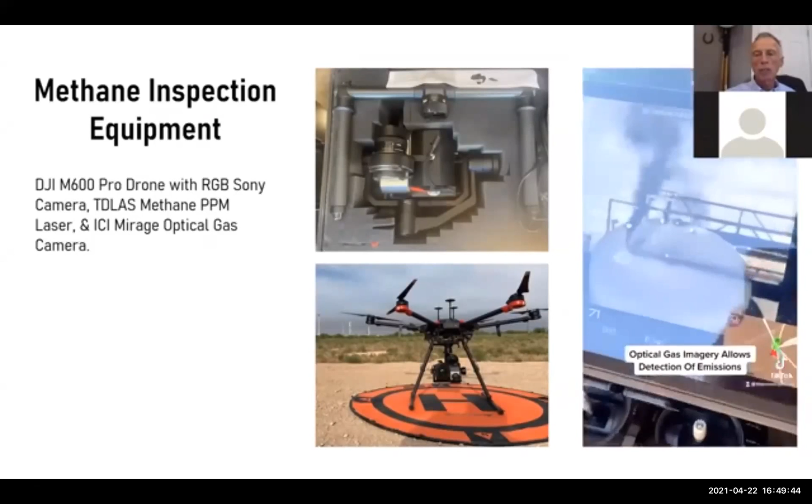M600 drone with an RGB Sony camera, a TDLAS parts per million laser, and an ICI Mirage optical gas camera. You see our drone taking off on the video on the right, flying over some towers. And what we're seeing on the screen is the OGI methane.

When we're flying methane, we have to be precise in GPS coordinates. We have to get accurate wind measurements. We have to fly in favorable wind conditions. We need an appropriate flight pattern and a steady flight height.

We are, though, superior over helicopter and plane, both of which are expensive, can't do repeatable flights, and give a less accurate analysis of the data.

Here's some good photos of the gas camera picking up some leakage in some tanks.

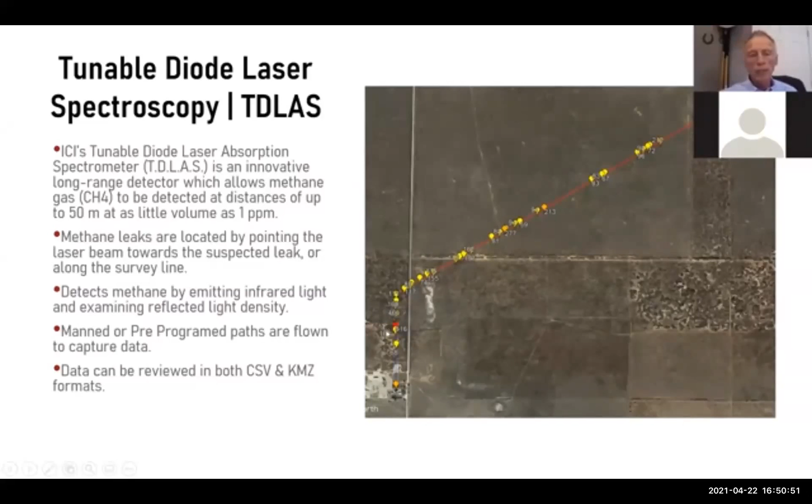This is an interesting slide. This is the tunable diode laser. You can see how Zach has mapped out on the red line the pipeline that we're going to fly. The yellow and red balloons are parts per million readings of when the laser has detected on certain footage a leak or evidence of methane. The red ones obviously are the higher parts per million. We can set the levels on the meter accordingly.

We're also flying flare stacks. Flare stacks contribute a lot to methane emissions. We fly them to inspect the structure, the ladders, the platforms, and heat shielding. We're looking for corrosion, missing objects, or mechanical damage, that sort of thing. What we find usually determines whether this can be helped by regular maintenance or we need to shut down and make a repair.

So that's what we think we can bring to the table with drone solutions to reduce the carbon footprint, both in the solar, wind, and oil and gas markets. We're excited about the data accuracy, the enhanced efficiency, the reduced inspection time, the exact access to the sites, and the automation of flight that the drone can provide.